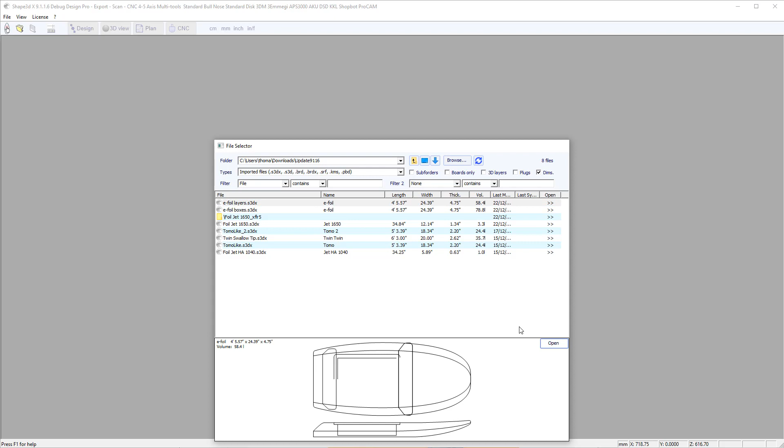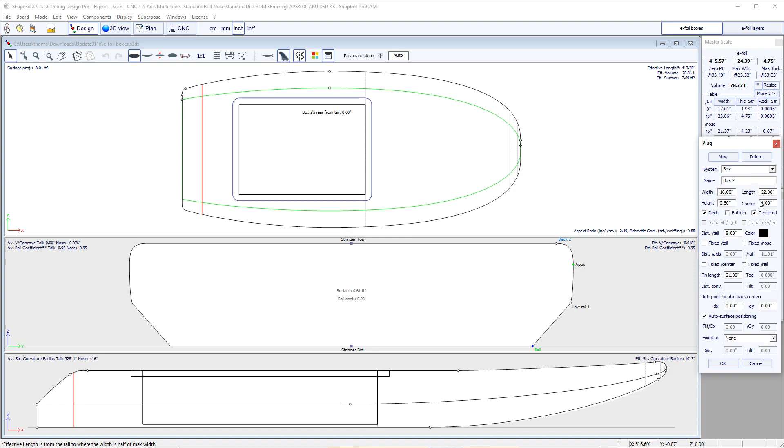So before, when you needed to design boxes with a rounded corner like here, this is the opening for a battery of an e-foil. So before this new update, you needed to do it with 3D layers, which is not so complicated but can be a little time consuming. Now you can just do it using plugs of type boxes and just define the corner radius here to get exactly the same shape.

And here we have one box with rounded corner and another box with a square corner, and we get exactly the same battery opening that you can cut in the CNC mode.

This new update also has a new protection option. So now when you check no modification, you can check resize only, which means that if you set a password and send the file to someone who doesn't have the password, then this other person can resize the file, but he cannot redesign the curves.

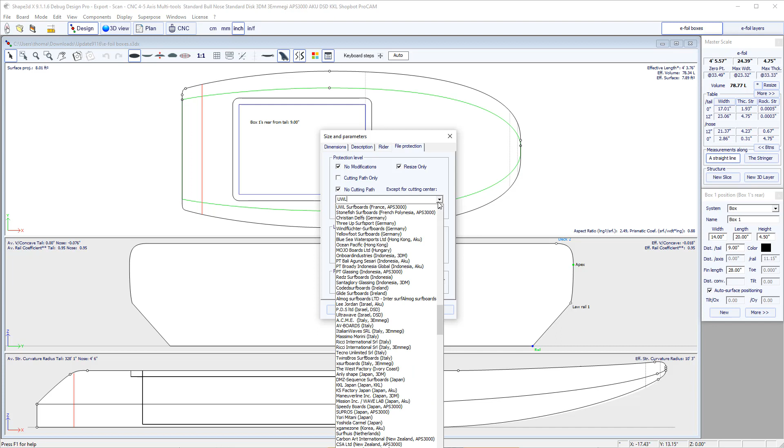Another protection function here that goes with no cutting path is that you can set no cutting path except for a particular cutting center, and Shape3d will load the list of all the cutting centers and you can select any one like here. So protect this file with a password, send your file to the cutting center, and be sure this file won't be cut by any other cutting center.

And of course, you can also combine that with a no reading after date to make sure your file is not used more than what you want.

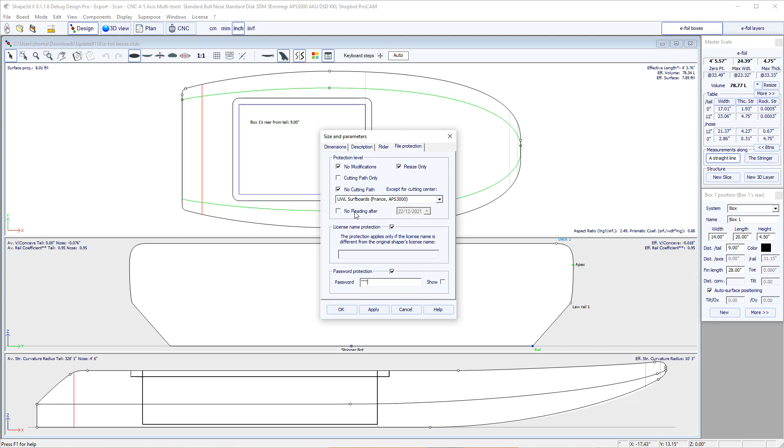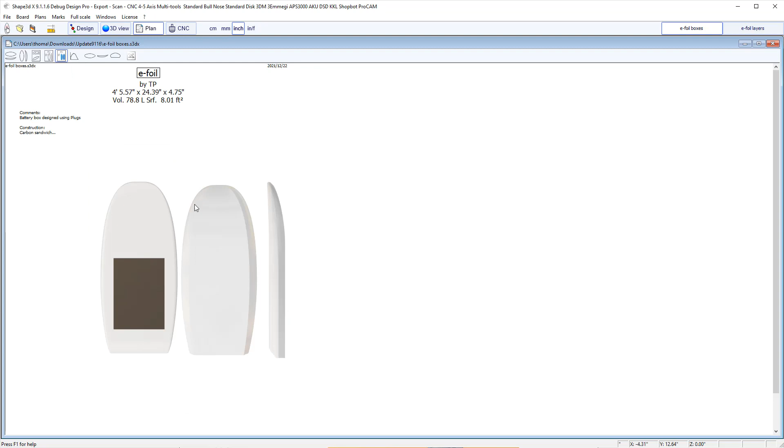This new update also has new plans print sheets. So we still have the general plan here in horizontal mode, and we added a vertical mode, and also we have the order sheet here that now can be used with dimensions.

In the CNC mode, now we can check the cut of these plugs. So you can see the rounded corners will be cut correctly.

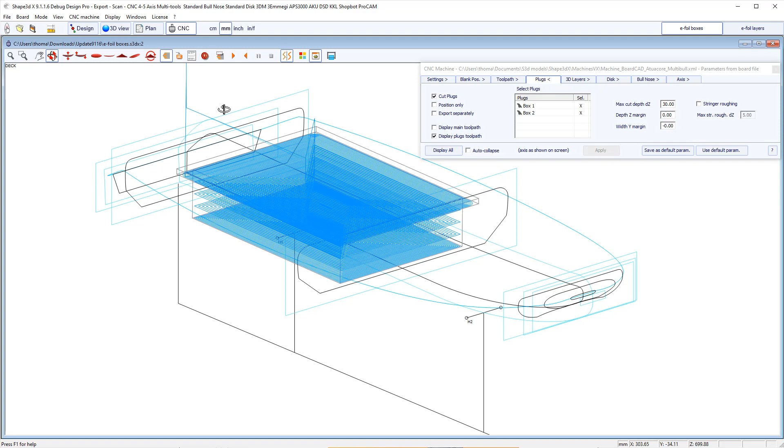Let me show you also an improvement we did on the disc cutting. So for disc, we have a motor security system that makes sure the motor won't hit the blank. And with previous version, you could only define a rectangular block like this.

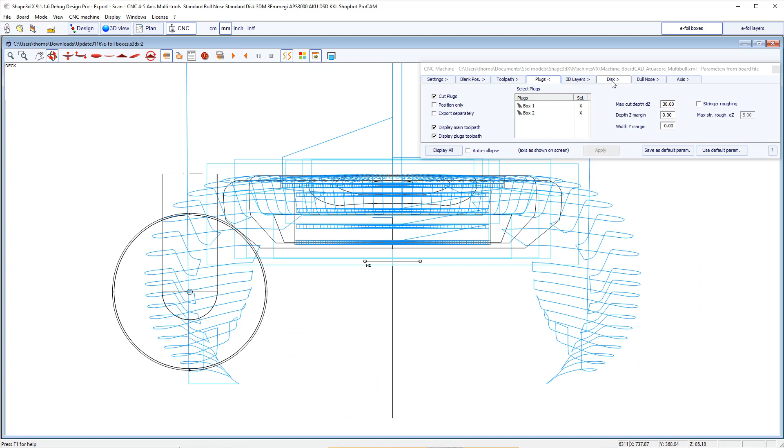But now, if you have a more complicated shape with a thinner arm and a bigger motor box, you can define the arm dimensions here, thickness and width, and the box dimensions.

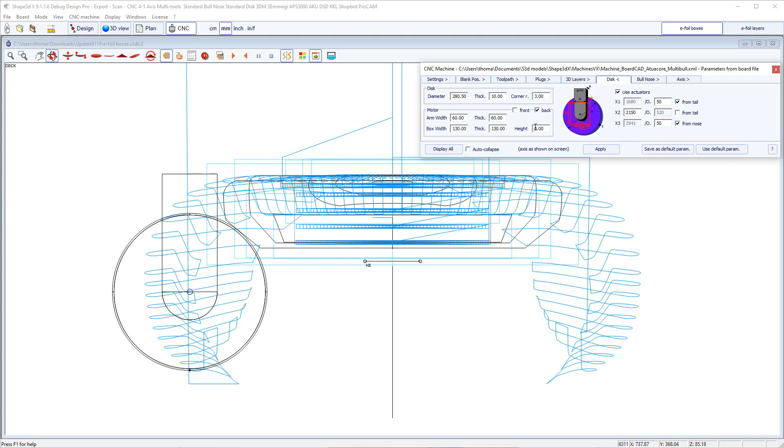And now you see you have the arm width and the box, and you see that the bottom rail cut will go as far as possible, and this way you can have the same security and more cut on the bottom rail.

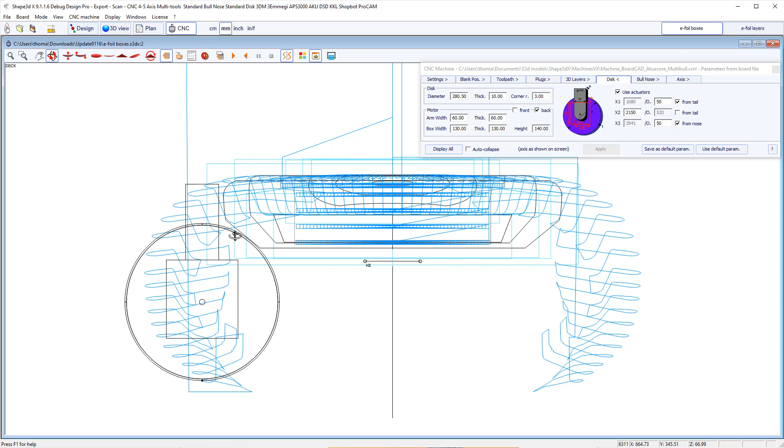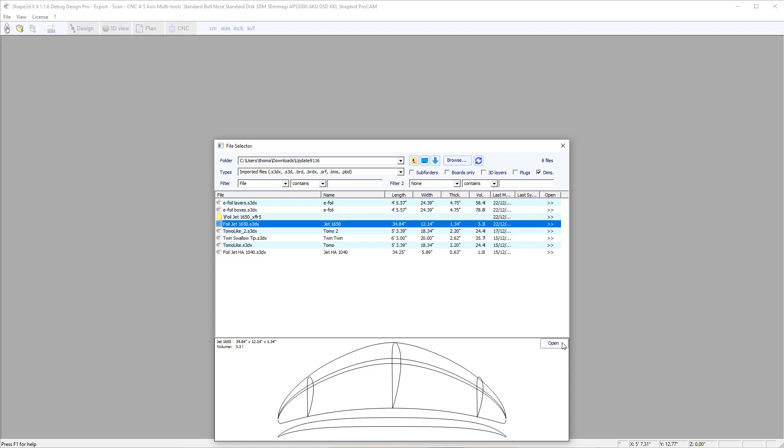In this new update, we also did a big improvement for asymmetric design, like for example hydrofoil designs here. So with previous version, you had to edit the stringer curve in the top view here for bent shape like this, but now you can leave them unedited here, and this allows you to have the center points of the slices free, so you can now move them sideways instead of using the edited curve. So this gives you more freedom.

And also we added a NACA profile generator. So you can define here the thickness, the camber, the max camber position, also some tilt. So here that would make the NACA 4413, and if I press OK, it will generate the guidelines corresponding to this NACA profile and fit the curve of your slice to the guidelines.

So here we see that it's not perfect, but this is due to the fact that the thickness is constrained by the deck stringer curve here, but you can unedit this curve so that the top center point of the cross section is free to move up or down. And now if I redo the NACA profile generator, I get a perfect fit.

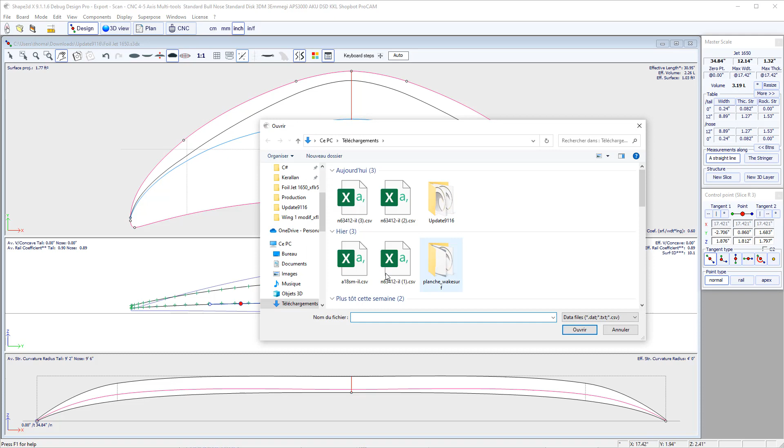Sometimes it's not perfect. Here you see the fit is not exact, so in this case you just need to insert a new control point and then redo the profile importation, and you'll get a better adjustment. So that's a very useful tool to design hydrofoils.

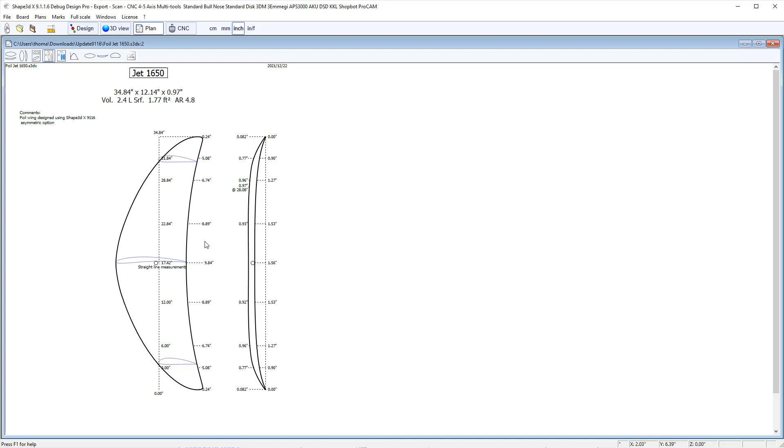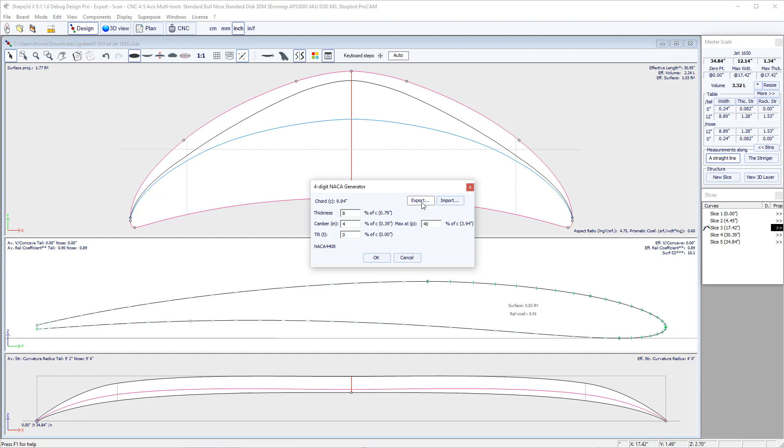And we also added the true aspect ratio number in the print sheet to make it even more useful. And we also added to this NACA profile generator a function to export to the XFLR5 software, which is a free software that computes the lift and the drag of a foil. It's made mostly for planes, but it works also for hydrofoils.

So let me go back to the original shape to show you how it works. So I go to the NACA profile generator, go to export, select a folder, and it will generate about 20 profile point .dat files and an XML file.

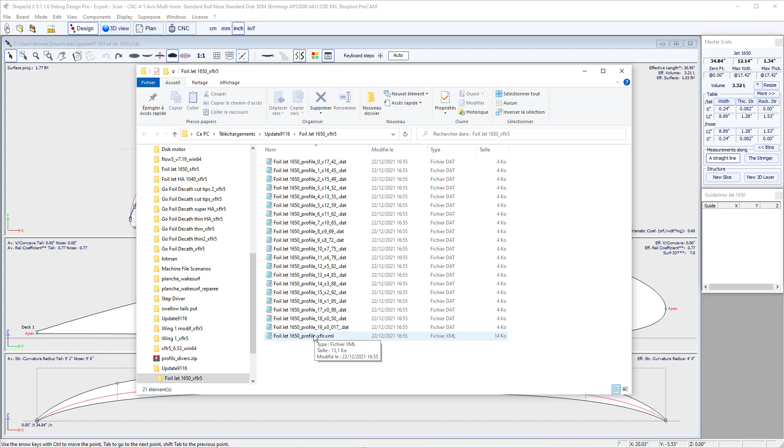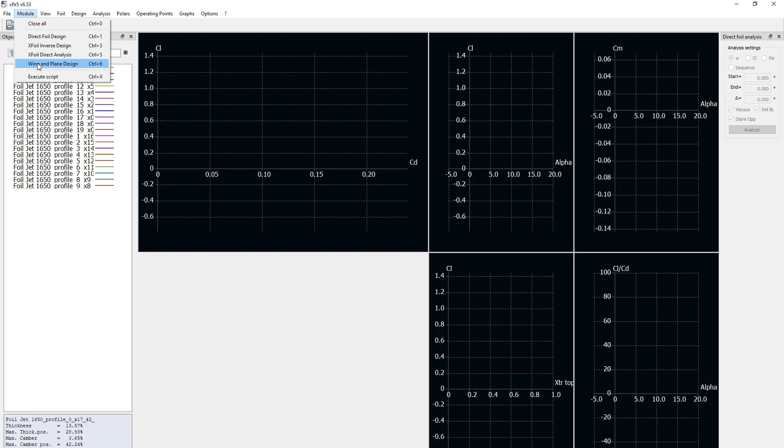And then just open XFLR5, go to new project, open, select all the profiles, then go to wing and plane design, plane, import XML, and here you have your wing, and now you just have to launch an analysis.

So for example, we can do a type 2 analysis, which is fixed lift, which means that it will compute the speed or the tilt angle needed to lift a given weight. So for example, here you can go for like 80 kilograms for the rider plus the board and foil. Let's set that kind of analysis.

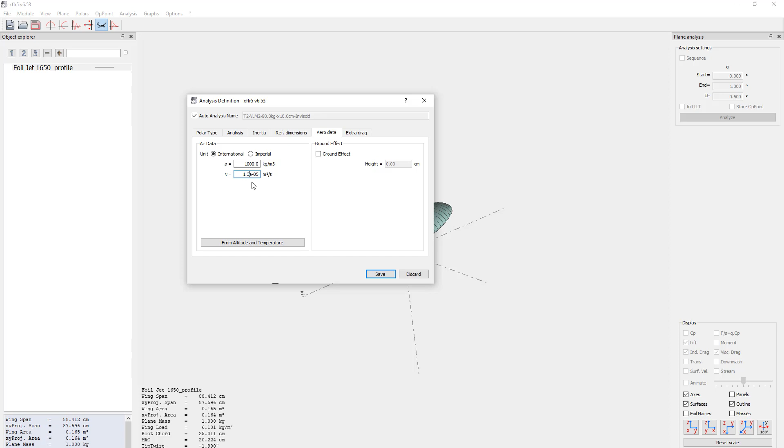And you also need to set the water density, which is around 1000, and the viscosity, which is like 1.3 × 10⁻⁶, and save, and then launch the analysis.

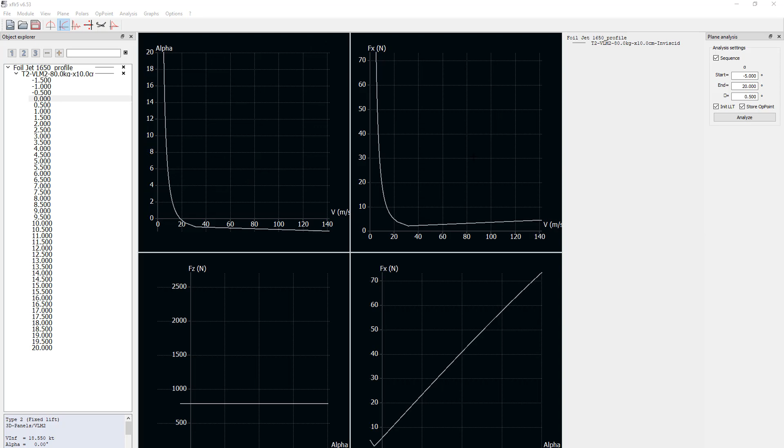And here you have the needed tilt alpha for any speed needed to get the correct lift, and you also have the drag for each speed. And this is a very good analysis that shows you in which speed range you can use your foil, and you can quickly compare with other foils you designed. And I'll do a more complete tutorial soon that you can download on our website.

So that's it for this update. I hope you will enjoy these new